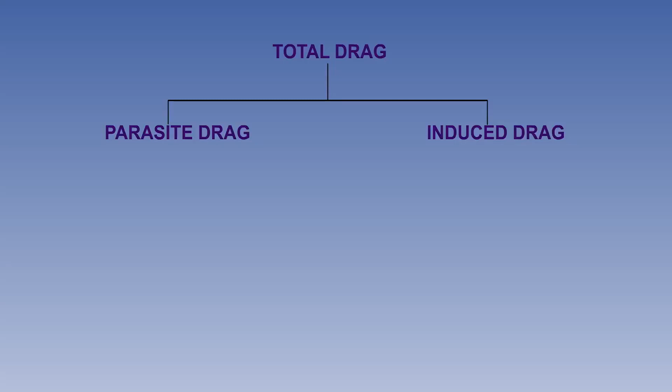If an aircraft were to be flying, but producing no lift or downforce, the only drag present would be parasite drag, which, as already seen in the drag family tree, is comprised of skin friction, form, and interference drag.

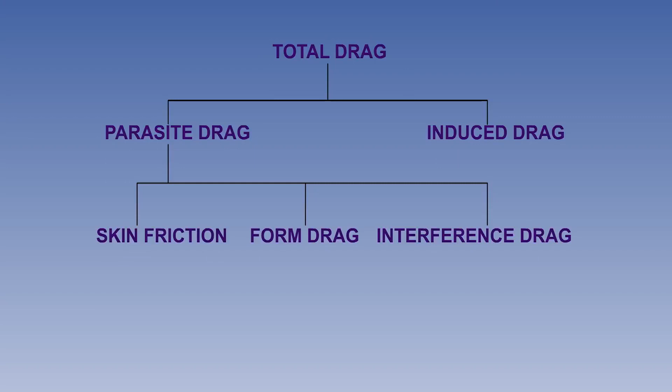An aircraft's skin, regardless of material, will to some degree have imperfections or roughness in its surface, due to paint, rivets, and other protrusions, contamination, etc.

Air particles in direct contact with the surface are accelerated to the speed of the aircraft and are carried along with it. Adjacent particles will be accelerated by contact with the lower particles, but their velocity will be less, but only slightly so, because of the low viscosity of the air. As distance from the surface increases, less and less acceleration of the air takes place.

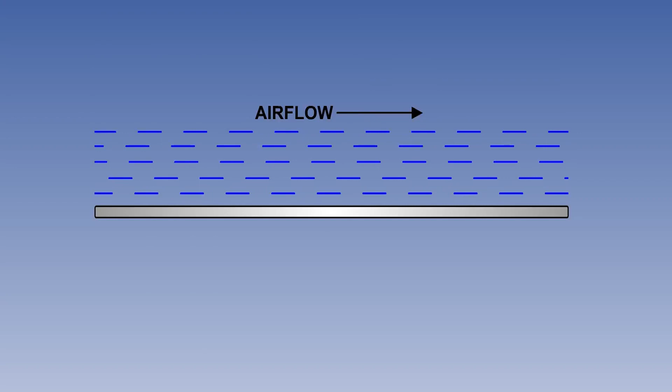Thus, there exists over the entire surface a layer of air whose relative velocity ranges from 0 at the surface to a maximum at the boundary of the air that is affected by the passage of the aircraft. This layer, from the surface to the point where there is no detectable viscous effect, is known as the boundary layer.

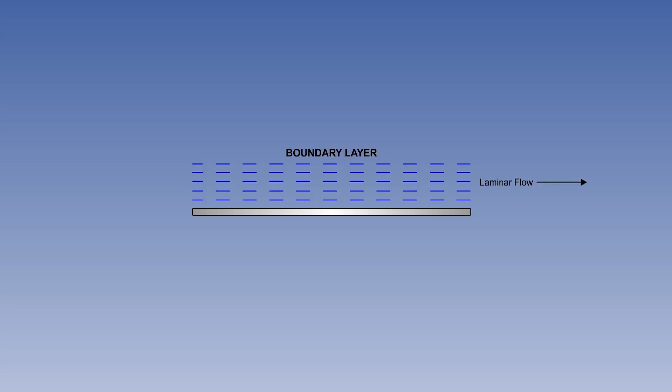Where the change of speed is smooth and progressive, the flow is referred to as laminar. In flight, the nature of the boundary layer will determine the maximum lift coefficient, the stalling characteristics, the value of form drag, and, to some extent, the high-speed properties of the aircraft.

The boundary layer is not always smooth or laminar. In general, the flow over the front of a surface will be laminar, but will become turbulent some distance back, at a point known as the transition point.

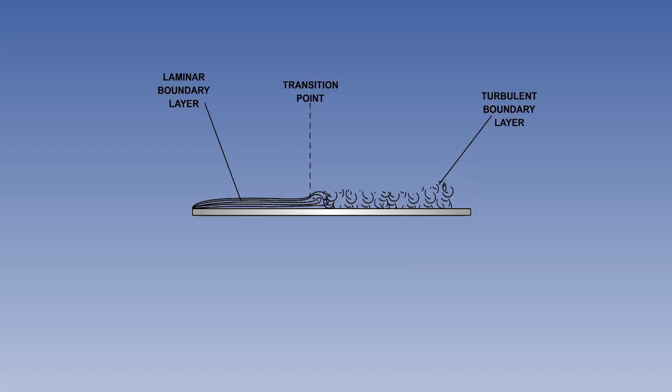The increased rate of change of velocity at the surface in turbulent flow will give more skin friction than laminar flow. A turbulent boundary layer also has more kinetic energy than a laminar layer, and is more resistant to separation. A forward movement of the transition point will increase skin friction because of the greater area of turbulent flow.

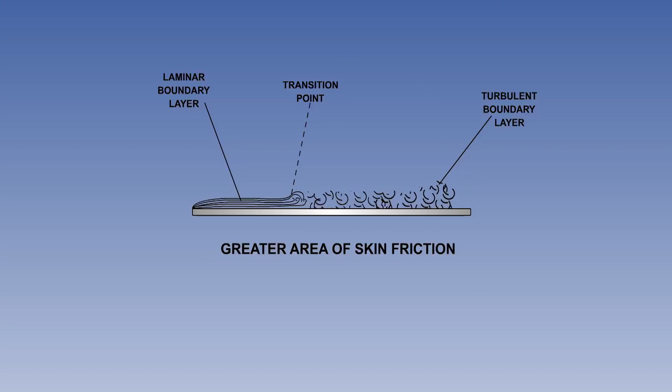There are two factors that can affect the position of the transition point. First, the surface condition. The thin laminar layer is very sensitive to any irregularities. Roughness on the leading edge skin can cause early transition to turbulent flow, which fans out downstream, causing a marked increase in skin friction drag.

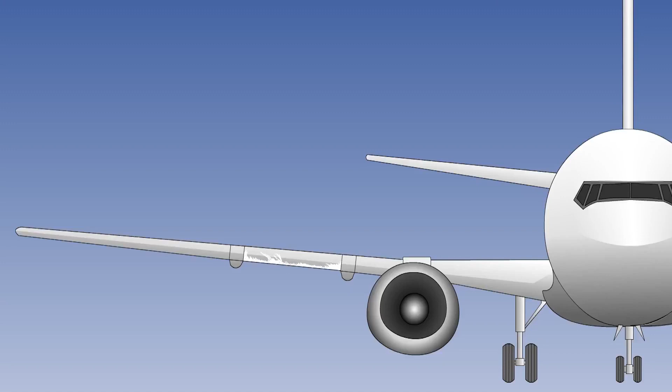Secondly, a laminar layer cannot exist where pressure is rising in the direction of flow. Over a curved surface, like a wing, the transition point is at or near the point of maximum thickness, which is the point of lowest pressure. So the flow is against what is called an adverse pressure gradient. The transition point is thus further forward than if the surface were flat.

It is worth noting that for clarity, the depth of the layers has been exaggerated in the diagrams. In reality, the laminar boundary layer is about 2 mm deep and thickens to about 20 mm in the turbulent flow.

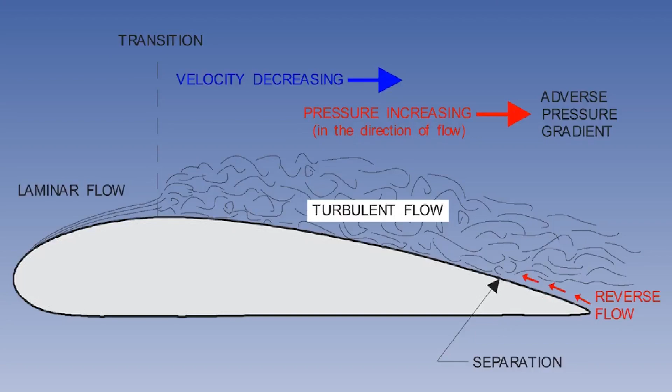Form drag results from the pressure at the leading edge of a body being greater than at the trailing edge, hence its alternative name.

Overall, skin friction causes a continual reduction of boundary layer kinetic energy as flow continues back along the surface. The adverse pressure gradient aft of the transition point also causes a further drop in kinetic energy.

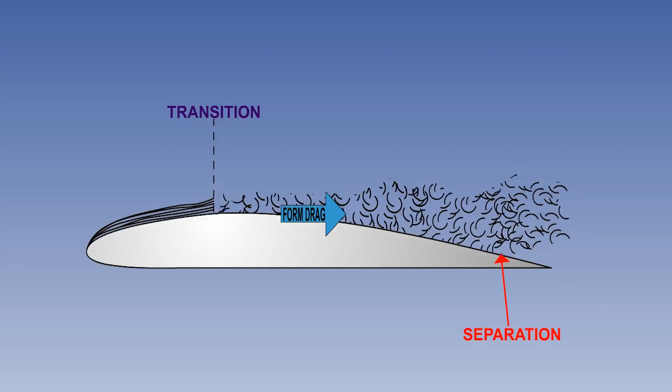If there is insufficient kinetic energy to overcome the adverse pressure gradient, the lower levels of the boundary layer stagnate, and the upper levels overrun them, causing separation.

The surface flow after the separation point will now be forwards, but because of separation, there will be a lower pressure at the trailing edge than at the leading edge. The aerodynamic force from high to low pressure thus acts against the direction of flight as form or pressure drag.

The loss of the kinetic energy required to overcome the adverse pressure gradient and prevent separation of the boundary layer can be caused by various factors.

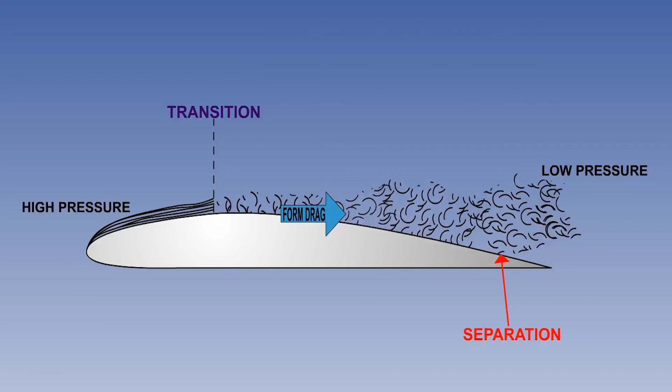As angle of attack increases, the transition point moves closer to the leading edge, and the adverse pressure gradient becomes stronger. This moves the separation point forward. Eventually, the separation point is so close to the leading edge that there is not enough wing area to generate the lift required. The CL decreases rapidly, and the wing stalls.

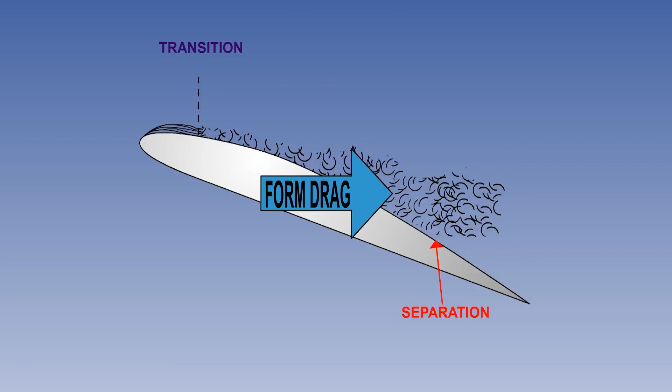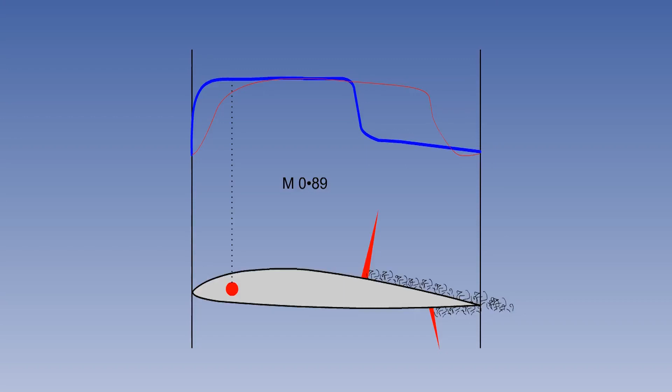Another factor concerns transonic flight. When a shock wave forms on the upper surface, the increase of static pressure through the shock wave creates an extreme adverse pressure gradient. If the shock wave is strong enough, separation will occur immediately behind it.

Coming back to subsonic flight, a turbulent boundary layer will resist separation better than a laminar flow meeting the same adverse pressure gradient. In some circumstances, this is an advantage.

For example, some aircraft have small vanes called vortex generators, fitted on top of the wing ahead of the ailerons, to ensure that the boundary layer remains attached longer than on the rest of the wing, to retain control effectiveness at speeds close to the stall. In normal flight, however, laminar flow is preferable, owing to its lower drag penalty.

The term streamlining is often used to refer to the smoothing of a vehicle's or aircraft's design shape, or the addition of fairings or fillets to modify it. But more specifically, it is the shaping of a body to keep separation as close to the trailing edge as possible.

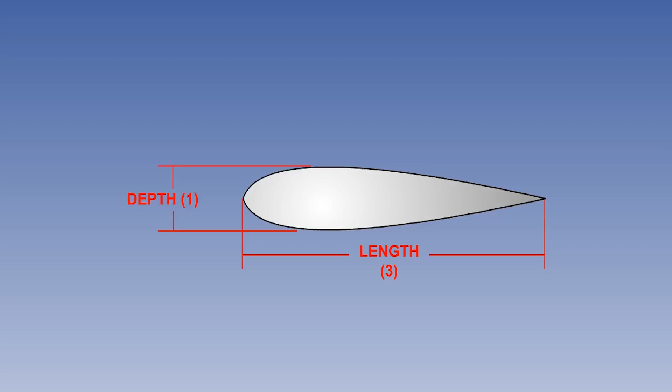Streamlining increases the ratio between the length and depth of a body, reducing the curvature which induces an adverse pressure gradient. The best fineness ratio, as it is known, has been found to be 3:1.

The combination of form drag and skin friction is known as profile drag, as it can be considered that it results from the cross-sectional area or profile of the aircraft presented to the relative airflow.

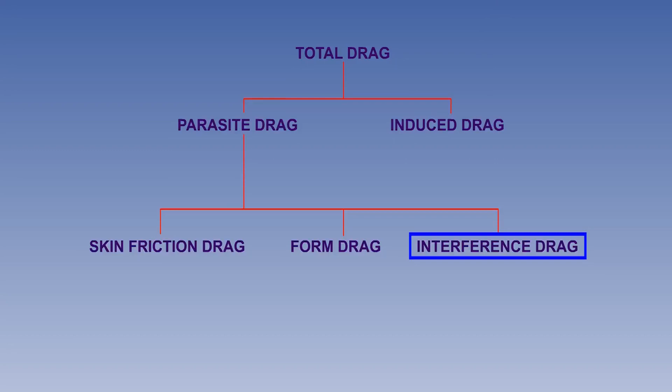The final element of parasite drag is interference drag. When considering a complete aircraft, the parasite drag in total will be greater than the sum of its parts. This additional drag is the result of interaction between the boundary layers of adjacent parts of the aircraft.

Probably the best example of this is the junction between fuselage and wing at the wing root. The air is accelerated over the wing and will be faster than the airflow over the fuselage. Where the two flows mix in the angle between the two surfaces, the interference causes turbulence and drag.

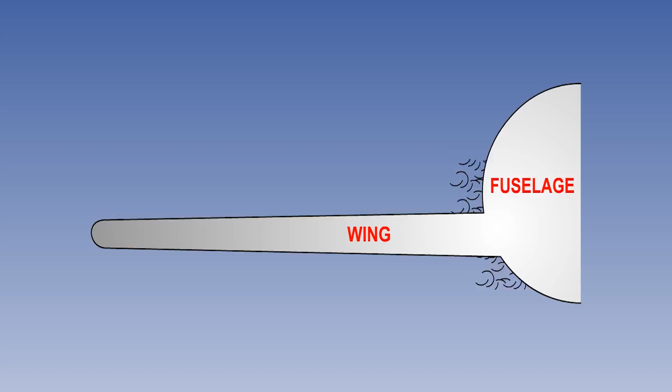The solution to this problem is to add fillets to smooth out the transition between the surfaces, making the velocity change more gradual, minimizing the turbulence and thus the drag.

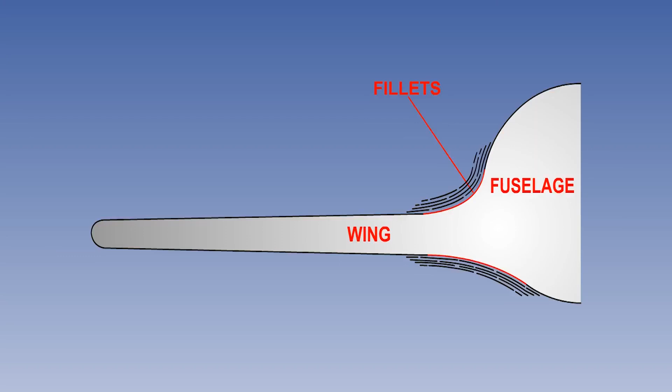There are a few factors which significantly affect parasite drag. First, like lift or any other kind of drag, it will vary directly with the square of the indicated airspeed. If IAS is doubled, parasite drag is quadrupled, and if IAS is halved, parasite drag is reduced to a quarter of its previous value.

Changes in configuration will also have an effect on parasite drag, which varies in direct proportion to the frontal area presented to the airflow. This cross-sectional area is known as parasite area. If flaps and landing gear are lowered, speed brakes extended, or roll control spoilers operated, parasite area, and thus parasite drag, will increase.

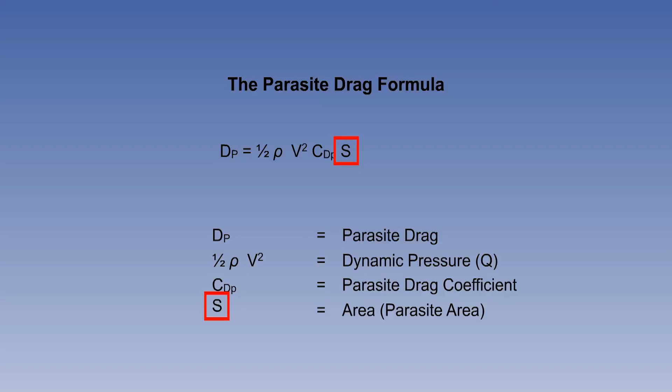Airframe contamination, that is, accumulations of ice, snow, frost, slush, mud, or even insects, will increase the parasite drag coefficient. In the case of severe airframe icing, the parasite area may be increased also.

From this examination of parasite drag, we shall move on in the next lesson to the other main constituent of total drag, induced drag.